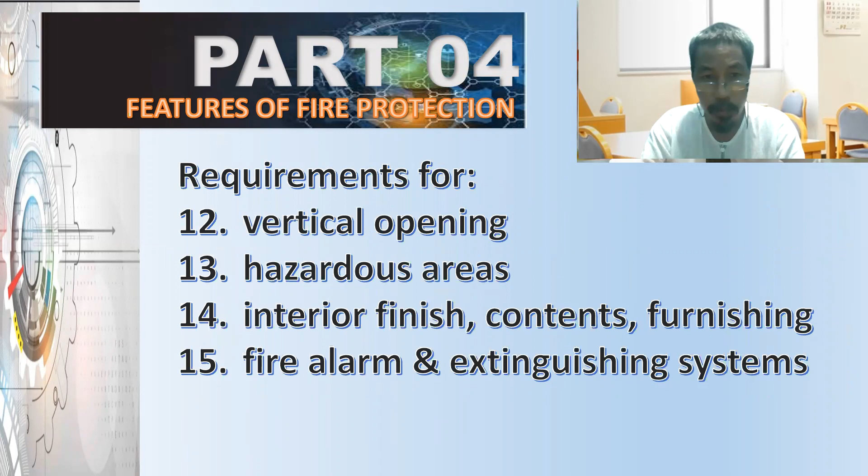So, features of fire protection, number 12, vertical openings, and we are going to discuss the second subtopic, floor penetrations. We already discussed the principles and concept behind why we need a minimum amount of floor or vertical openings, because smoke and toxic gases would seep into the adjacent area, which may add to the risk of occupants not in direct vicinity of the fire.

So the fire breaks out here, and the next room should be safer, the next floor should be safer. Because smoke and toxic gas will go up, and the heat will go up too. Every byproduct of fire will pass through the openings. According to the data, these openings statistically added a substantial amount of fatalities to fire incidents in historical counts.

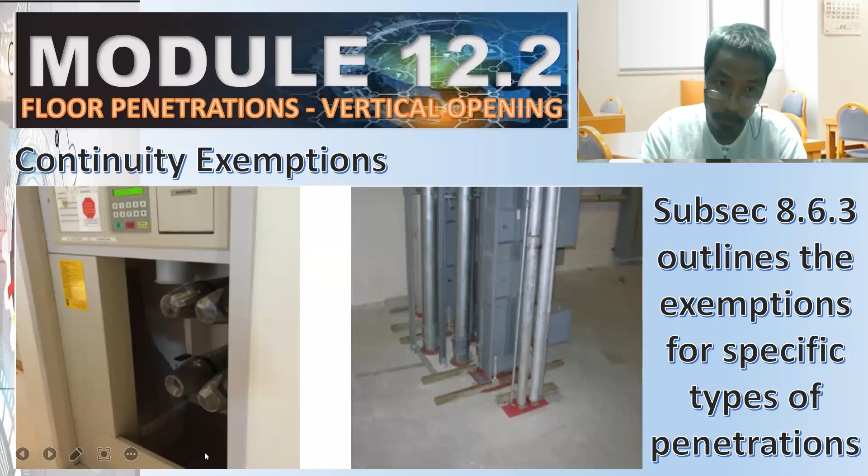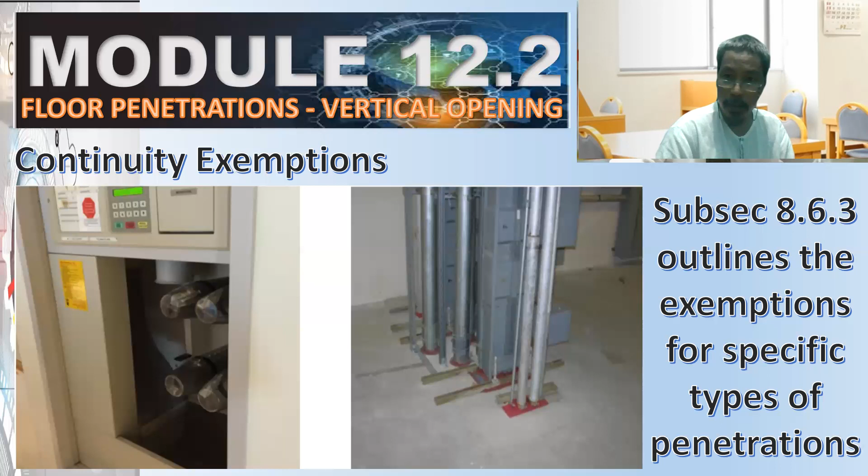So here in the picture we have shafts for pipes and utilities, pipes again here, and ducting that necessitate openings in the floor. Those are vertical openings. As you can see, there are materials installed to seal up those gaps. Also here we can have a cover to this opening, and a wall. Those are expected to have a fire rating equivalent to the fire barrier wall.

So exemptions. The requirements of 8.6.2 shall not apply where otherwise permitted by any of the following. Number one, where penetrations are for cables, that is electrical: cable trays, conduits. It could also be electronics. Pipes, either plumbing or mechanical. Tubes, mechanical. Combustion vents, mechanical, and exhaust vents, plumbing. Wires, electronics or electrical. Pneumatic tubes, mechanical.

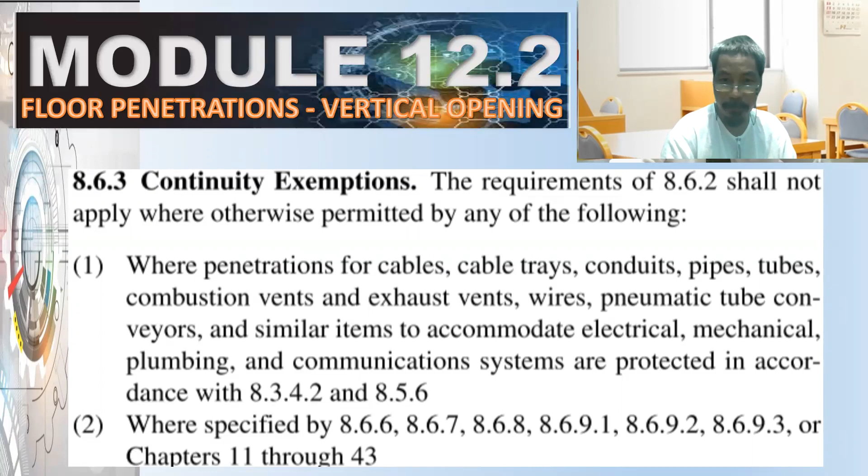Pneumatic tube conveyors send material or product from upper floors going down, or if you are using vacuum, you can send product from the lower portion of the building. And similar items to accommodate electrical, mechanical, plumbing, and communication systems, communication being the electronic devices, are protected in accordance with 8.3.4.2 and 8.5.6. So these penetrations are exempted; they are permitted if protected in accordance with 8.3.4.2 and 8.5.6.

If you read the provisions written in this subsection and section, the requirement is almost the same as the requirement for vertical openings. So really, it is an exemption, but it could only be a meaningful exemption for existing buildings, because the code's requirement for this protected subsection is almost the same as the vertical opening requirement for new construction.

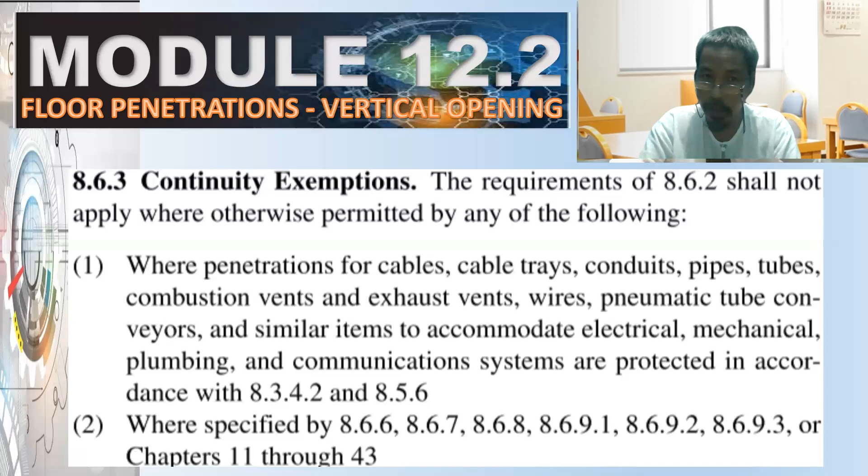Number 2, where specified by these specific sections: 8.6.6, 8.6.7, 8.6.8, 8.6.9.1, 8.6.9.2, 8.6.9.3, or Chapters 11 through 43. Those chapters are occupancy chapters. There might be specific requirements that allow something, and therefore it is permitted here due to that special provision.

Number 3, where escalators and moving walks are protected in accordance with 8.6.9.6 or 8.6.9.7. Moving walks are usually horizontal, escalators are diagonal, and moving walks are usually called walkalators.

Number 4, where expansion or seismic joints designed to prevent the penetration of fire are shown to have a fire resistance rating of not less than that required for the floor when tested in accordance with ANSI/UL 2079, Standard for Tests for Fire Resistance of Building Joint Systems. So you take the fire rating of the floor and test the expansion joint. If it is the same or more than the floor's rating, it is permitted as an exception.

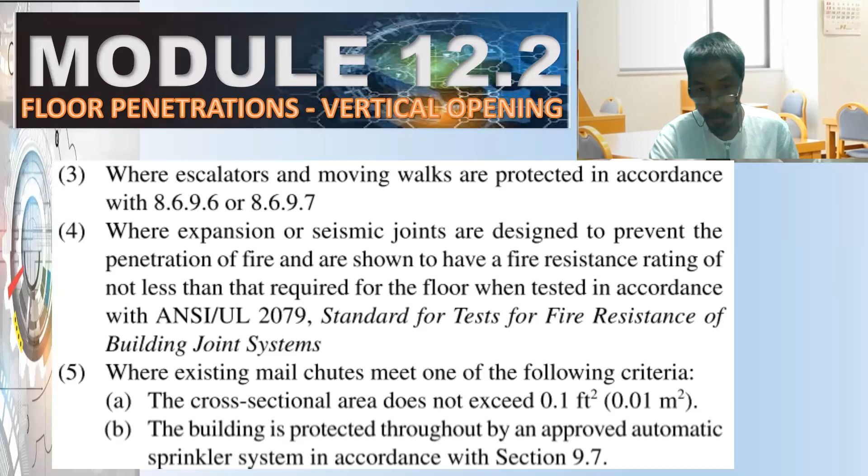And letter B, the building is protected throughout by an approved automatic sprinkler system in accordance with section 9.7. So the building is with ASS that satisfies the condition of section 9.7. Then ASS would allow these things to be permitted. Okay. That is for what? Existing mail chutes. When there is an automatic sprinkler system, bigger cross-sectional areas of the mail chutes are allowed or permitted.

Okay. So 8.6.5 required fire resistance rating. The minimum fire resistance rating for the enclosure of floor openings shall be as follows. Number 1, enclosures connecting 4 or more stories in new construction, 2 hours. If you are connecting 4 floors or more, 2 hours fire barrier. And number 2, other enclosures in new construction, 1 hour fire barrier. So new construction, everyone 1 hour. But if you are connecting 4 stories or more, 2 hours.

Number 2, meaning 1 hour is 1 floor to 3 floors, 1 to 3 stories. Okay, so 4 stories or more, 2 hours. So existing enclosures, number 3, in existing buildings, 1/2 hour fire barrier. So that's why I said a while ago that meaningful exemptions are only for existing buildings, because they already passed the design and approval of the fire protection features. So they will just be exempted.

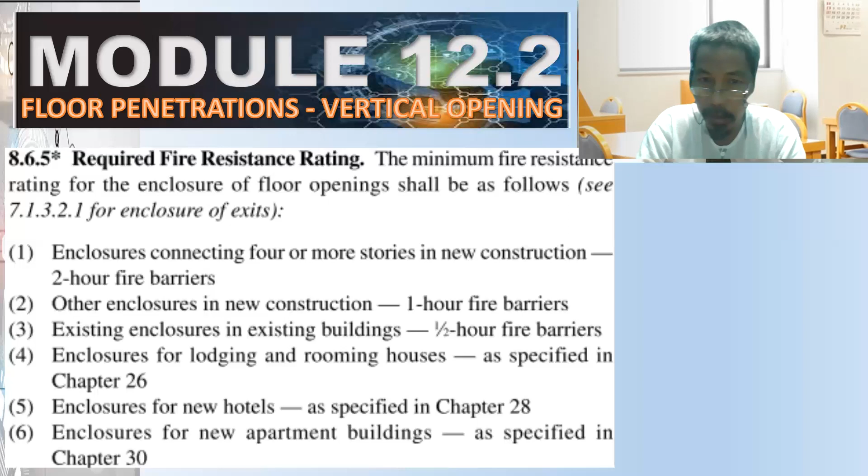Okay. And number 4, enclosures for lodging and rooming houses, enclosures for new hotels, enclosures for new apartment buildings are specified in their corresponding occupancy chapters, 26, 28, and 30. So there are specifics about lodging and rooming houses, hotels, and apartment buildings, which are new. So therefore we can memorize it: 2 hours for 4-story and above, 1 hour for 3-story and below, and 1/2 hour for existing buildings. Okay, so those are the requirements.

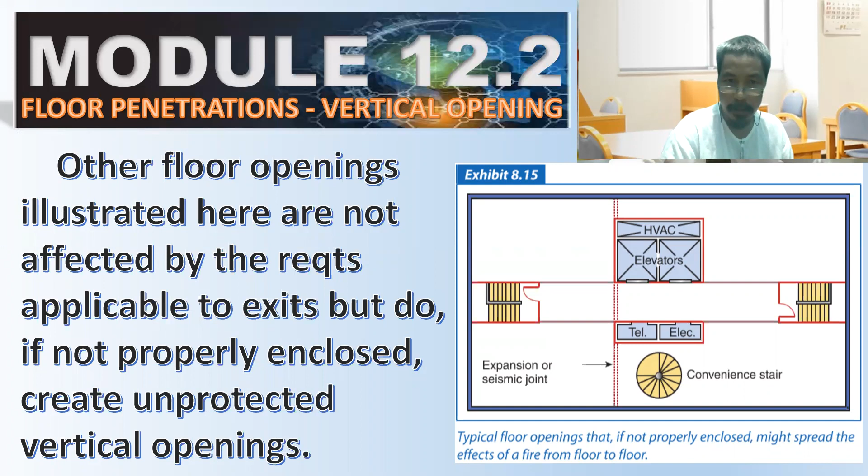And what about other floor openings? There are several examples of those openings here. Illustrated here are openings not affected by the requirements applicable to exits, but which, if not properly enclosed, create unprotected vertical openings. Typical floor openings that are not properly enclosed might spread the effects of fire. It will add to the spread of fire, but they are not affected by requirements. Anyway, this is for the decision of the owner of the building and the designer, if they want a safer place, although it is not entirely required by the code.

What are those? It's shafts: elevators, telephone, electrical. So those are the shafts. Elevators or mechanical shaft, telephone, electronic shaft, and electrical shaft. Okay, and fire protection shaft, fire exit. So expansion or seismic joint here. This is civil engineering or structural engineering. And convenience stair.

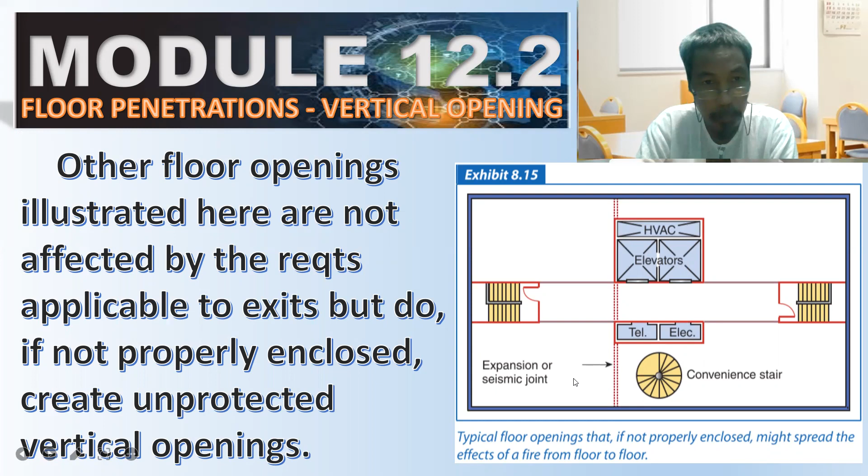So you'll notice there's no wall barrier in the convenience stair, but we have wall barriers for these exit stairs. We have wall barriers for mechanical, electronics, and electrical. We do have fire barrier. Look at the color, it is red. So there is a fire barrier protecting the expansion joint using barrier walls. So those are some other types of vertical opening.

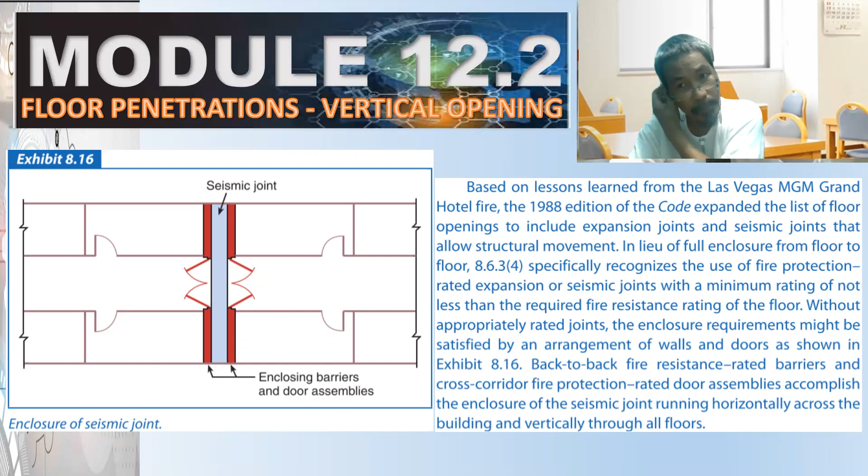So based on lessons learned from the Las Vegas fire, the 1988 edition of the code expanded the list of floor openings to include expansion joints and seismic joints that allow structural movement. In lieu of full enclosure from floor to floor, it specifically recognizes the use of fire protection rated expansion or seismic joints with a minimum rating of not less than the required fire resistance rating of the floor. Minimum fire rating should be the same as the fire rating of the floor. So that is about what? 2 hours. Without appropriately rated joints, the enclosure requirements might be satisfied by an arrangement of walls and doors as shown in the picture.

Arrange the walls and doors like this. The seismic joint, we have the enclosing barriers here together with the door. Exit. So we have seismic. So nice, it's a nice design. We have a lobby that could be used as a passageway. But still, we have a door that is fire rated, because we have a seismic joint. So we need to design even the seismic joint to be placed specifically at those areas, if ever possible. So it depends on the design.